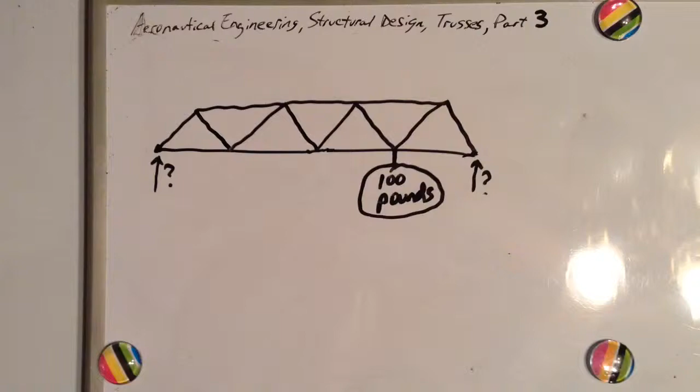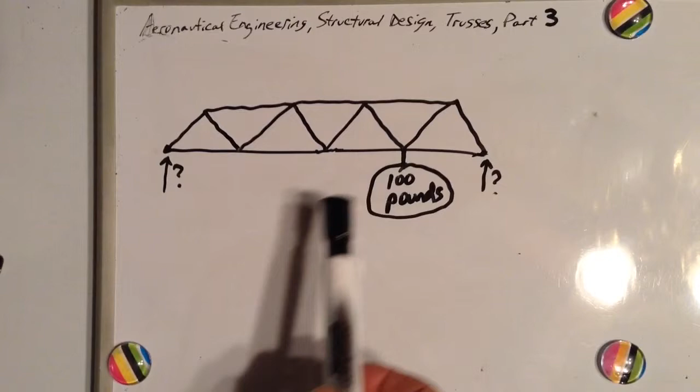Let's say we have our same weightless bridge, but instead of our 100 pounds hanging from the center of it, we move it over to here. How will that affect the forces on our bridge supports? Obviously, this one will have an easier lift, and this one will have more to lift.

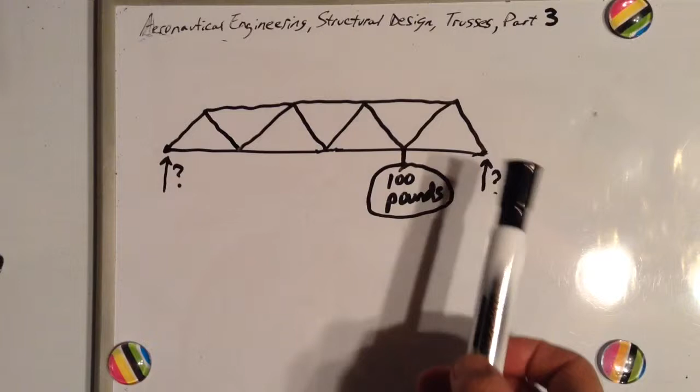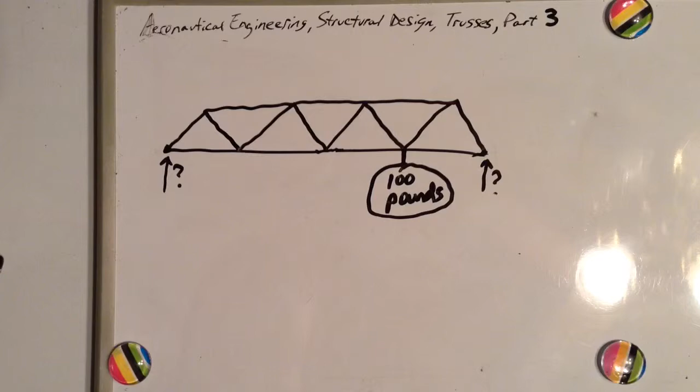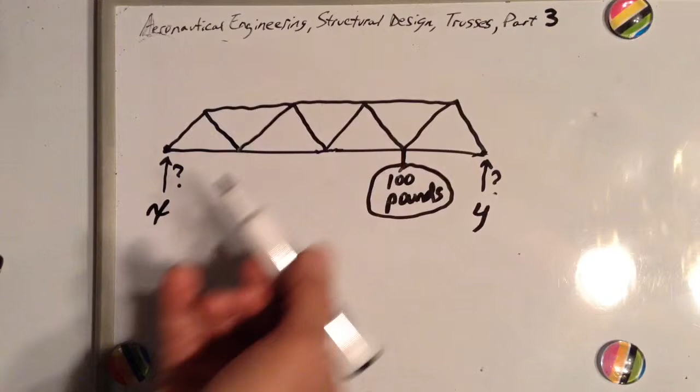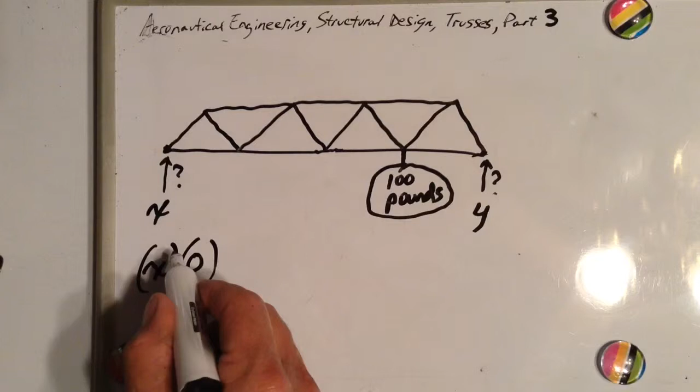Okay, let's look at all the forces times their distances about a certain point. Let's let this be that certain point for our first calculation. Let's call the force that the left bridge support exerts X, and we'll call the right bridge support's force Y. So let's look at all the forces trying to turn this bridge either counterclockwise or clockwise about this point. Well, this bridge support is pushing right at that point, so that would be X times 0 distance, because it's not far away from it like this 100-pound weight is.

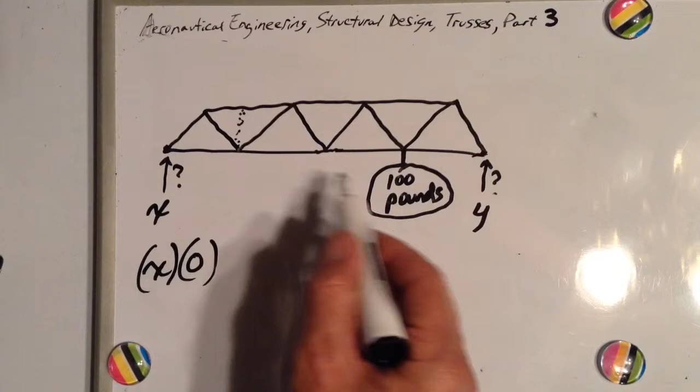It's right at it, so in other words, it doesn't really count in the equation. So we have this 100 pounds times this distance. We could call that 1 arbitrarily. That'd be 2, that'd be 3. This would be 1/2 from here to here, because we've established that this distance down there is equal to this distance and equal to this distance, so this would be twice this. So let's call this 1, 2, 3, and since it's clockwise, we'll call it positive. So let's say plus 100 times 3.

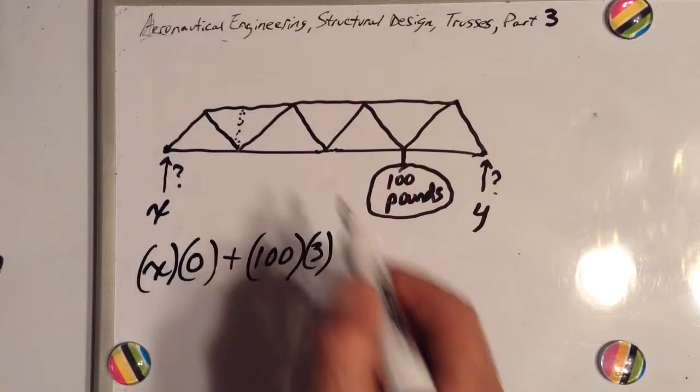Okay, and now we have the right bridge support. It's pushing up, trying to turn this bridge counterclockwise, and its distance is 1, 2, 3, 4. So let's say minus y times 4. It all has to add up to 0, just like that wrench we looked at in the last part. One guy trying to turn it one way and the other guy trying to turn it the other way. If it's not moving, the guy pushing closer to the bolt has to push harder.

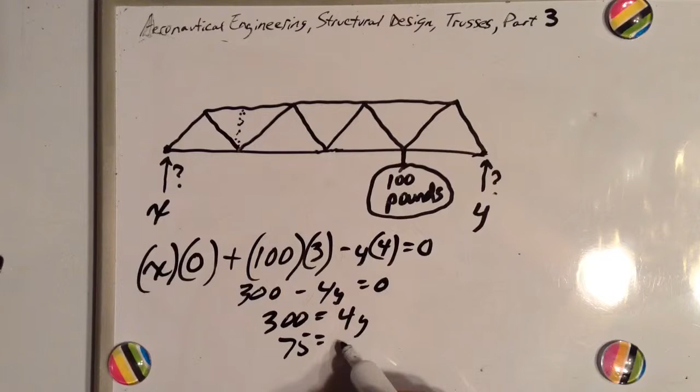Well, let's look at our equation. X times 0 is 0, so we have 300 minus 4y equals 0. Let's add 4y to each side of the equation. 300 minus 4y plus 4y leaves us with just our 300 equals 4y. Let's divide each side of the equation by 4. We have 75 equals y. We know that x plus y equals 100. So y would be 75, x would be 25.

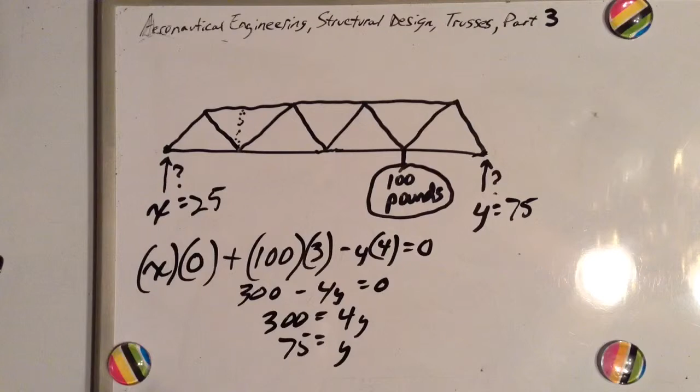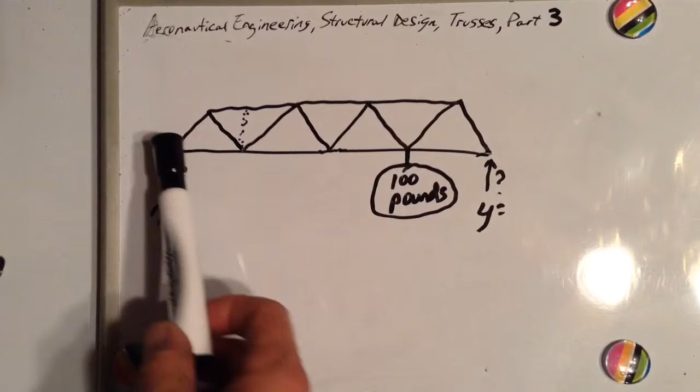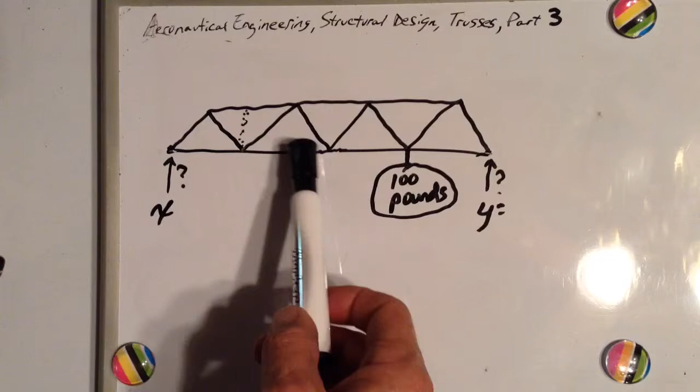We can work this problem out another way. Instead of looking at all the forces times their distances from this point, let's look at all the forces times their distances from this point. Well, we have x pushing up here, and it's 1, 2, 3, 4 - 4 whatever's, 4 feet, 4 meters, 4 inches, we don't care. As long as we know this proportion, we know that is twice as much as that. Okay, so x times 4 is the force times the distance about this point. So let's write 4x. It's going clockwise, we'll call it positive.

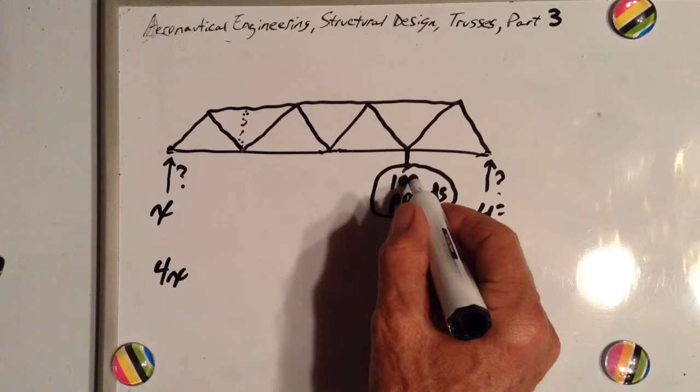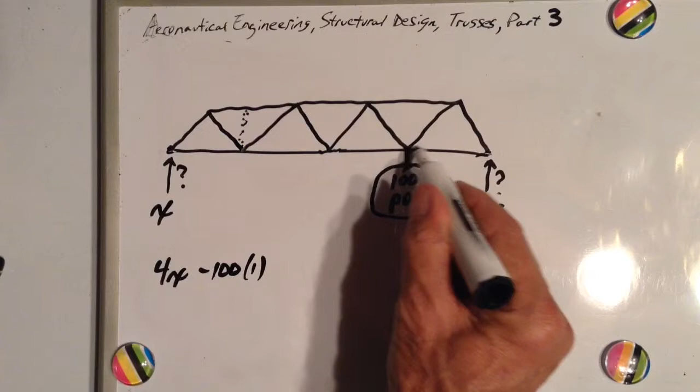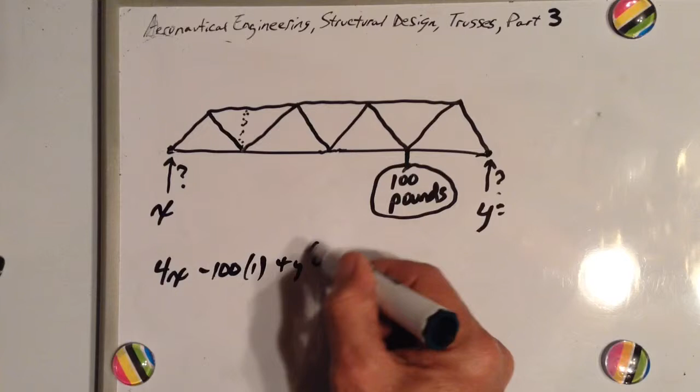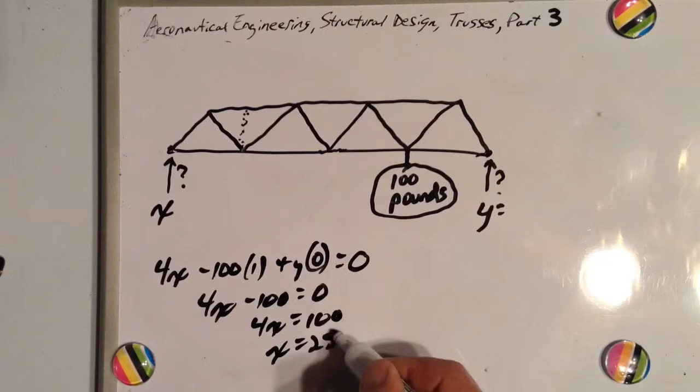Okay, here's 100 pounds trying to pull this bridge counterclockwise about this point. So let's say minus 100 times 1, because it's 1 from there to there. Okay, now the right bridge support is pushing right through that point, so plus y times 0, which is 0, equals 0. Okay, so we have 4x minus 100 equals 0. Add 100 to each side and we have 4x equals 100. Divide each side by 4 and we have x equals 25. Same answer we got last time. X 25, y 75, because x plus y has to add up to what our weight is.

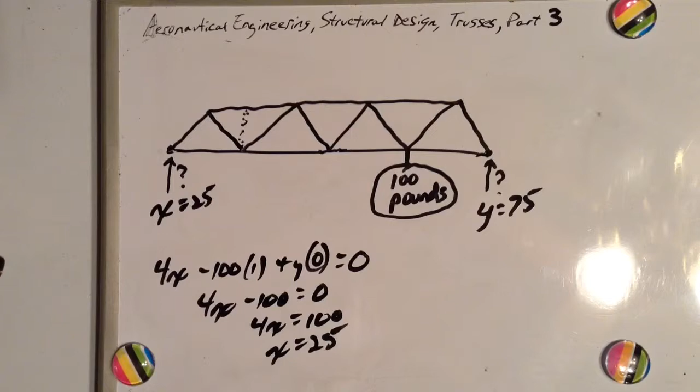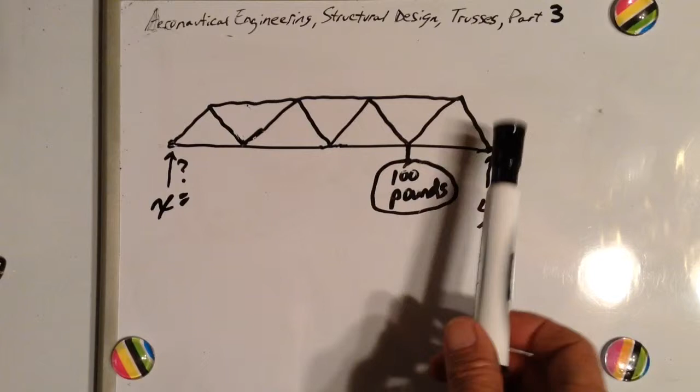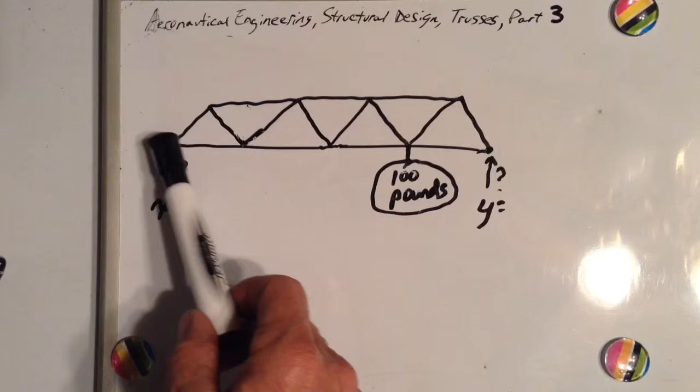Remember, our bridge is weightless. Only our 100 pounds has weight. We've looked at all the forces times their distances about this point, and we've looked at all the forces times their distances about this point. Let's try this point. Okay, we have X trying to turn this bridge clockwise about this point, and its distance from there, let's call it 3. 1, 2, 3. X times 3, clockwise.

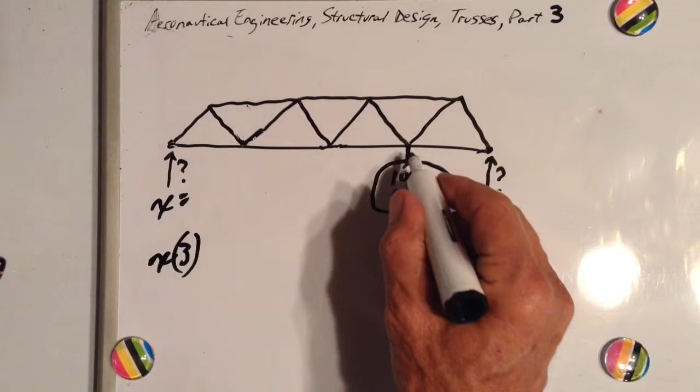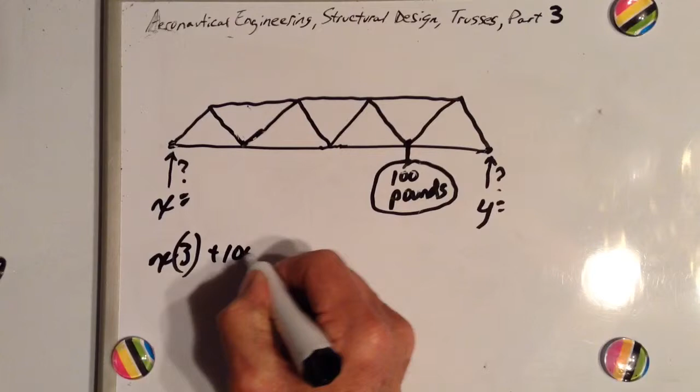Okay, we have 100 pounds pulling right through that point, so its force vector is 0 distance away from that point. So we can call it plus 100 times 0, or minus 100 times 0. It doesn't really matter. Anything times 0 is 0.

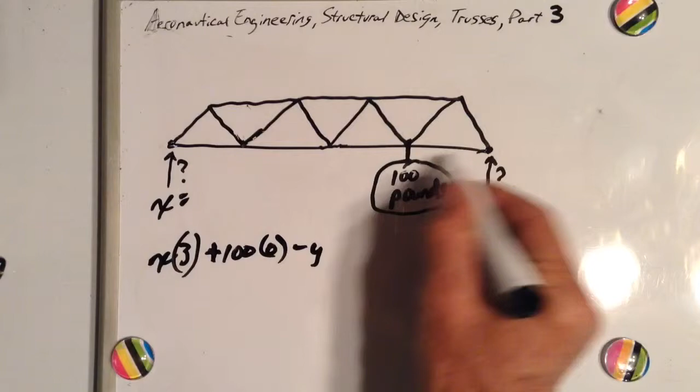Now we have Y, the right bridge support, trying to rotate the bridge counterclockwise about this point, so we'll call it a minus. So minus Y times its distance, which is 1, all adds up to 0. So 3x plus 100 times 0, which is 0, minus y equals 0.

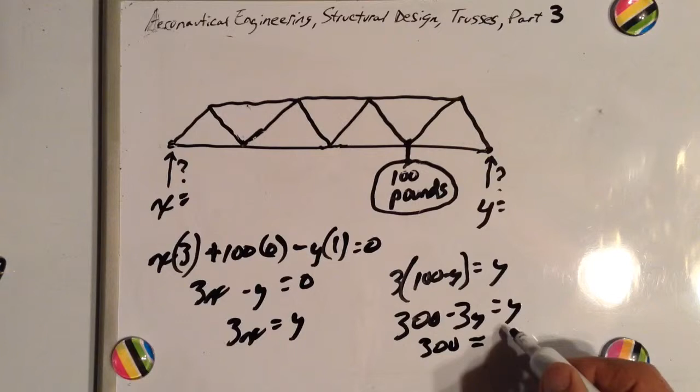3x equals y. But we know that x plus y equals 100, so x is going to equal 100 minus y. So let's say 3 times 100 minus y equals y. So 300 minus 3y equals y. Add 3y to each side of the equation. 300 equals 4y. Divide each side by 4 and you have the same old answer. 75 equals y.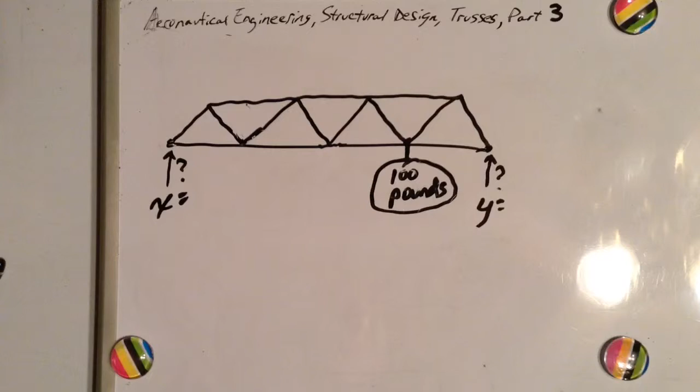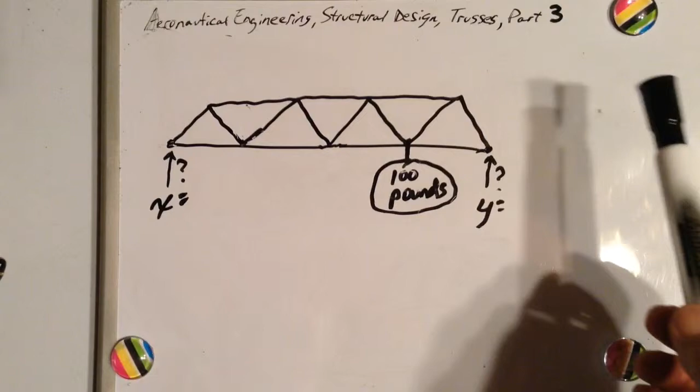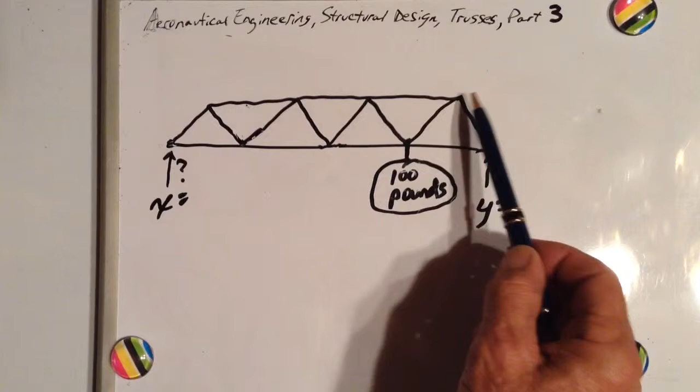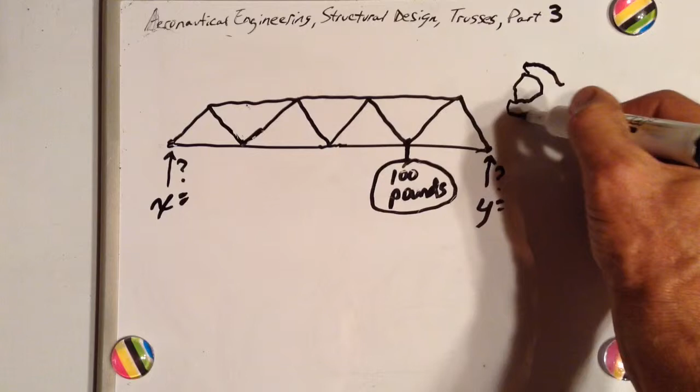We can even figure all of our forces times their distances about this point if we wish and still find our answer. Okay, we can say x times 1, 2, 3 and a half. We're not measuring from that point to that point. We're measuring from that point to a line going under that point. It's kind of like if you have a nut here and a wrench on it. There's the other end of the wrench. You slide it over so we can see it.

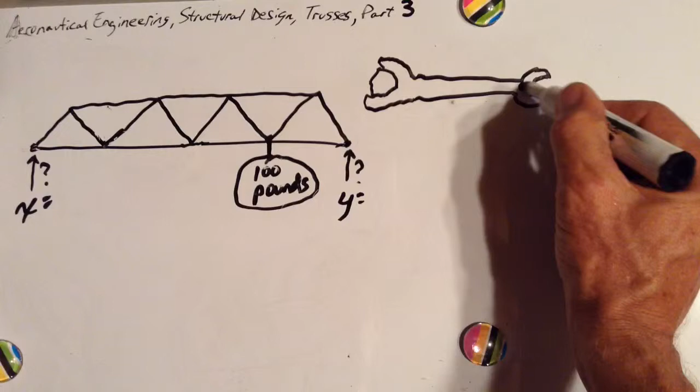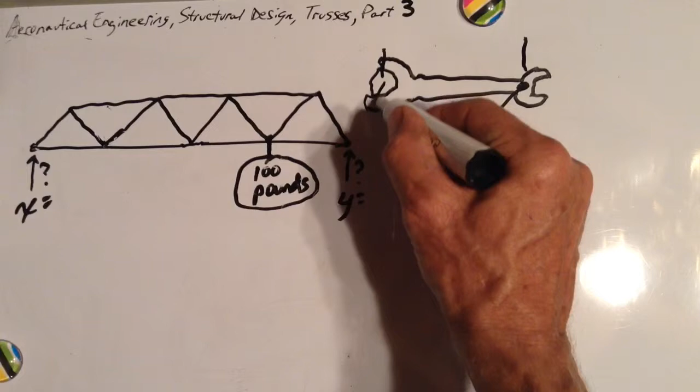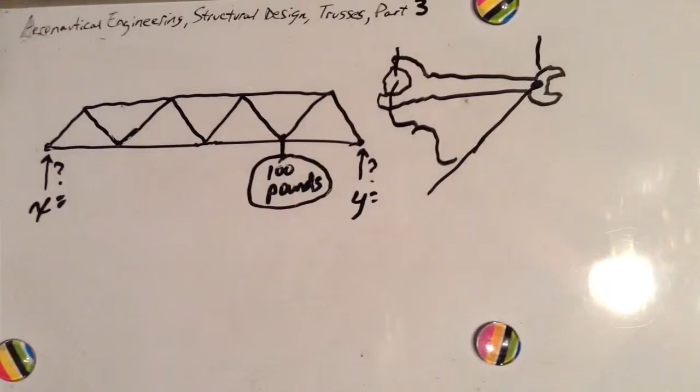And you drill your hole there and you tie a string to it and you pull it this way. Well, it's not this distance that you multiply your force times, it's this distance, because your rope is a little closer to the nut here than that hole is. So we're not so concerned about this distance from here to there, even though it's almost the same.

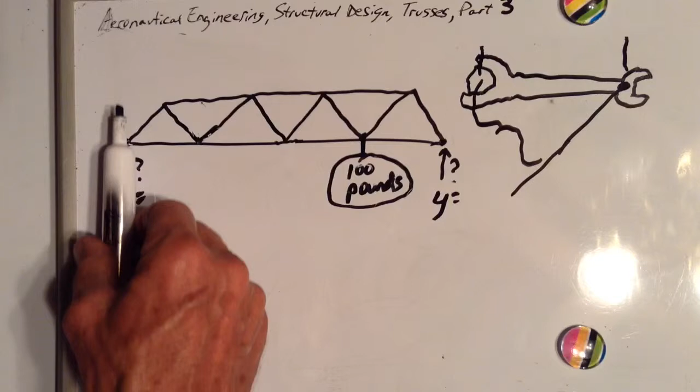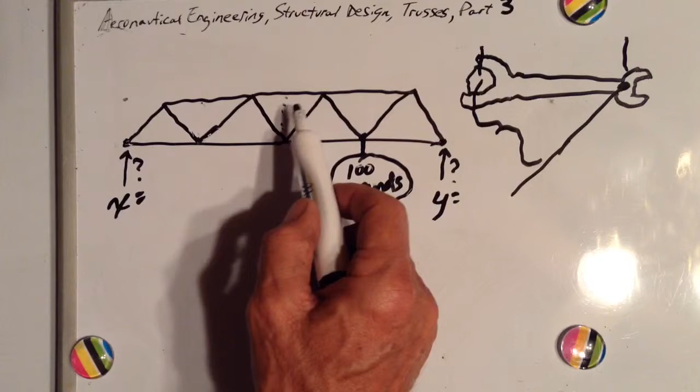We're concerned about our distance from our force vector to this point. Our force vector goes straight up, so it would be a distance from there to this point, which is 3.5 if we're going to call these 1 between there. Remember that was half of that, and that is half of that. May not look like it, but it is. We've established that earlier. So that's 1, 2, 3.5. So let's say x times 3.5 is its force times distance about this point.

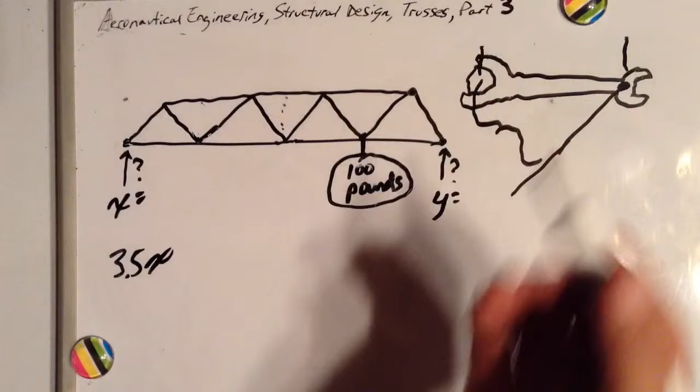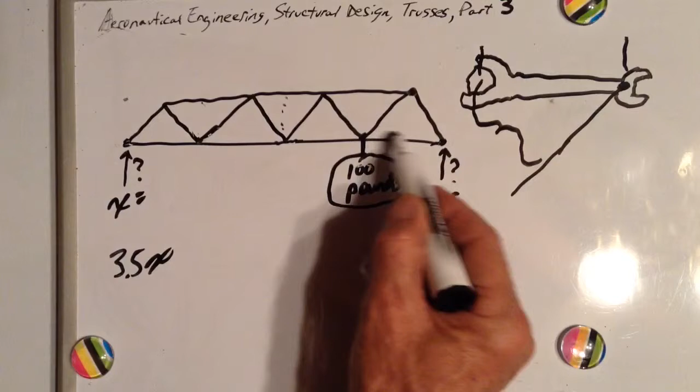So 3.5x. It's going clockwise, we'll call it positive. Okay, here's 100 pounds trying to pull this counterclockwise about this point, and it's 1/2 away from it. So since it's counterclockwise, we'll call it minus 100 times 1/2.

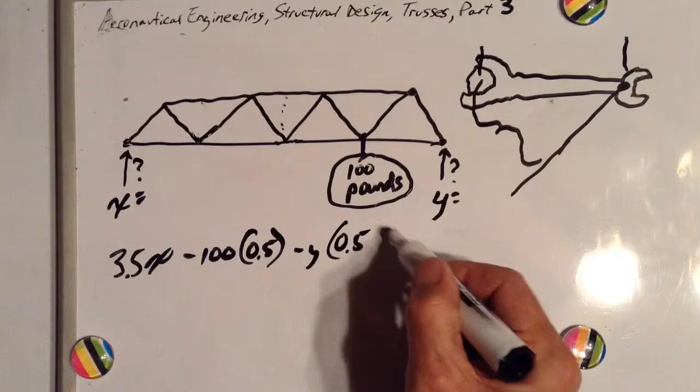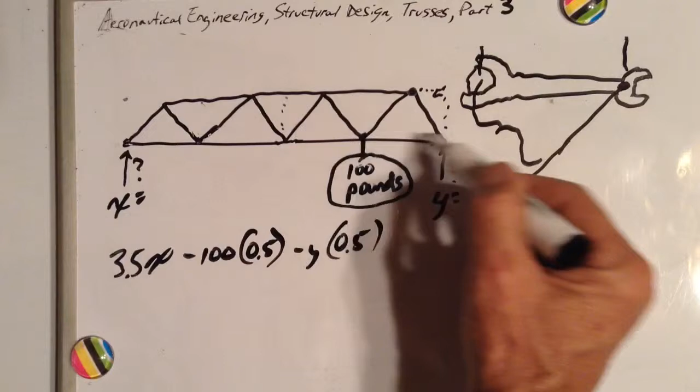Okay, now this y force is also trying to turn it counterclockwise. So let's call it minus y times 1/2, because it's 1/2 from here to here. This force vector is right up here. The perpendicular distance to it is 1/2. We're arbitrarily calling that 1, so that's 1/2. Okay, here, and that all balances out, so it equals 0.

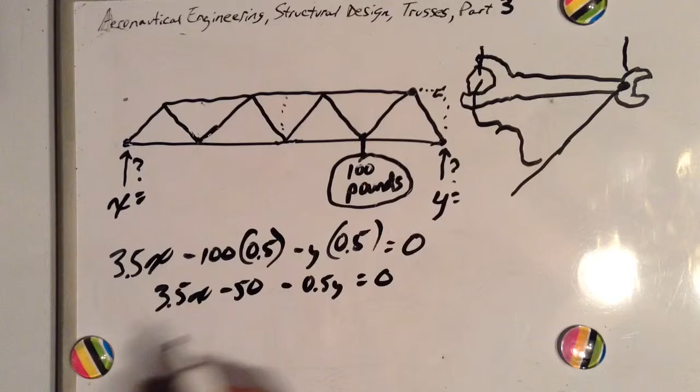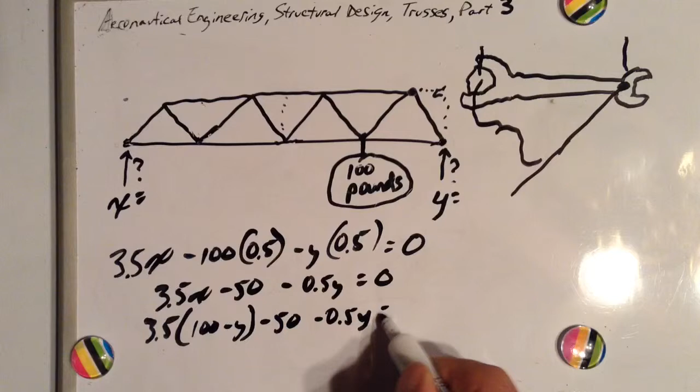Okay, so 3.5x minus 50 minus 1/2 y equals 0. So we know that x plus y is 100, so x is equal to 100 minus y. So let's just call this x 100 minus y. 3.5 times 100 minus y minus our 50 minus 0.5y equals 0. Okay, 3.5 times 100 is 350.

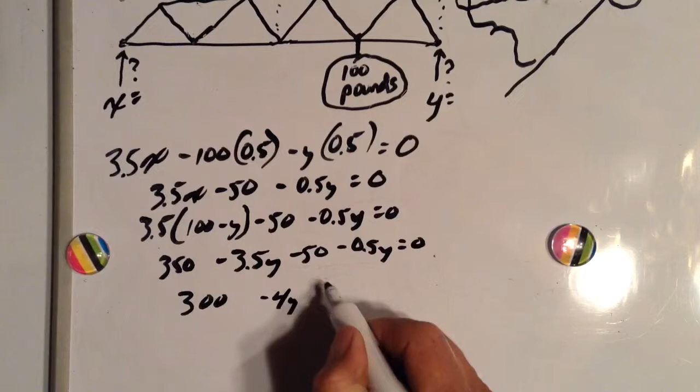Minus 3.5y minus 50 minus 0.5y equals 0. Okay, 350 minus 50 is 300. Minus 3.5y minus 1/2 y is minus 4y equals 0. Let's add 4y to each side of this equation. That gives us 300 equals 4y. Let's divide each side by 4 and we have the same answer. 75 equals y. And x plus y equals 100, so x is 25 once again.

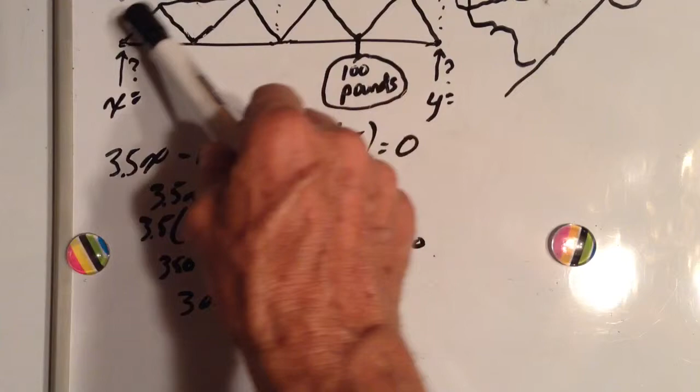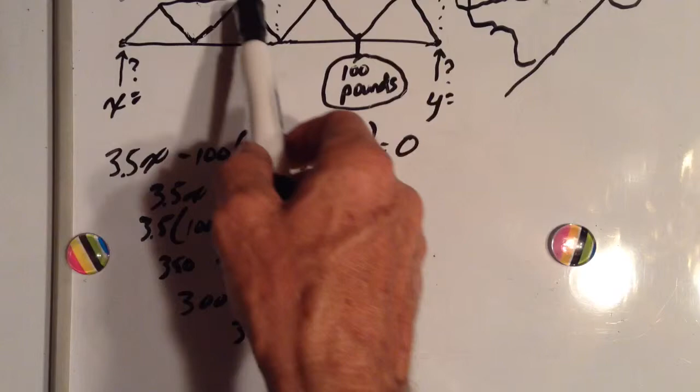No matter which point we pick on this structure, all the forces, the outside forces acting on this structure, the left and right bridge supports and this weight hanging from it, those forces times their distances from any given point on this structure have to balance out. They have to add up to 0.